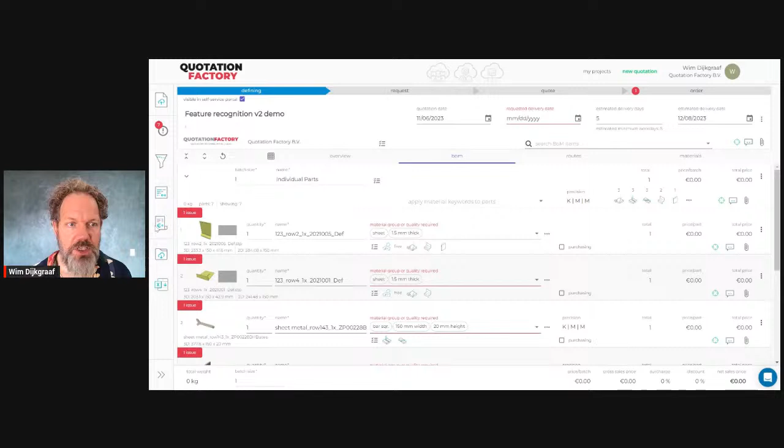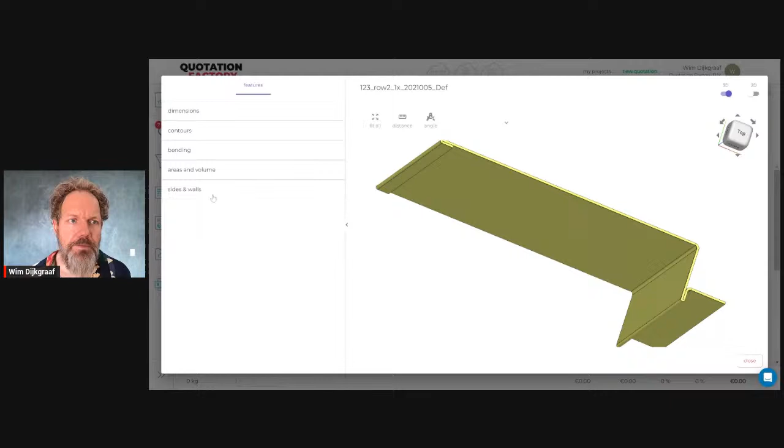my screen became visible. So what you see now is previously we already showed the features that we found, but there's a table here in the left bottom corner of this window, and it was not interactive. What we can do now is, let me remove this 2D model such that we have a little bit more space to work with, like this. You can now open this up, and where it is underlined, it's interactive. So I click this, and now you see this hem being highlighted. You also see here the various properties of this hem, and the fact that this bending is a hem already was known by this attribute yes.

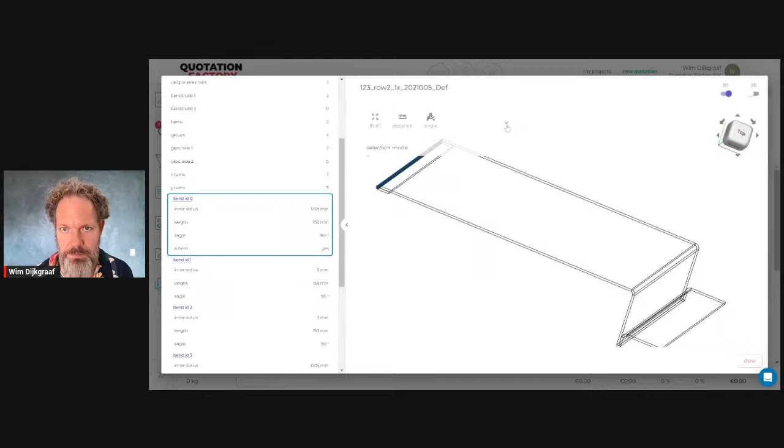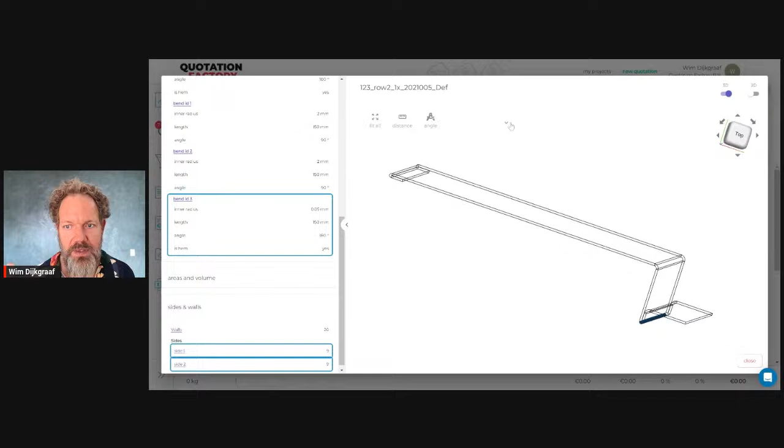In order to find the highlighted features more easily, you can also show it as a wireframe. So for example, if I now go to this, then you see this bending, this normal sheet metal bending being highlighted. I can also press this, that bending is highlighted, and I can click this, and you see that the other hem is being highlighted. Yeah, so now the features are interactive in the viewer, and you can highlight them.

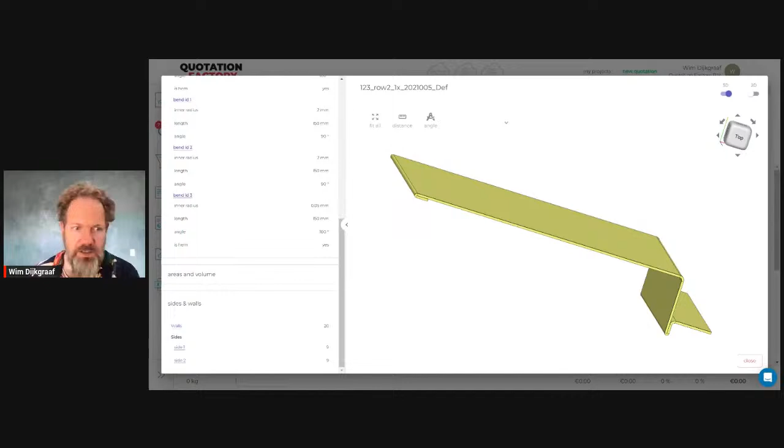Also, something important to note is that most of our sheet metal related customers, they really want to be able to assign a side which should be the upper side. For example, if it has a foil side or a surface side, like a certain pattern. We are pretty close to that, because as you can see now, you can highlight a whole side like this, or the other side. All the information is known and also in the viewer. So we are just a little step away from also adding this feature to the platform.

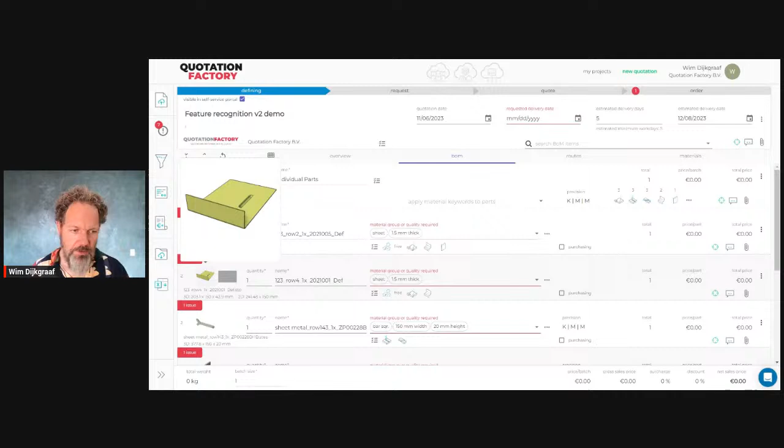Well, what's the whole idea behind feature recognition? That in the end, if you assign a feature to a working step, and that working step to a machine, and for example, also that working step to a party in the supply chain, you actually create a route. And that route has the information in it, which features, where in the process will be manufactured, which way, by whom, on which machine.

And because we do feature recognition, we also can de-feature features, such that we can create 3D models of how the product looks in all the intermediate steps in the whole route. Which also means that in the near future, you will have 3D models that only contain the features needed in order to program the CAM system for that specific machine and for those specific features to be manufactured.

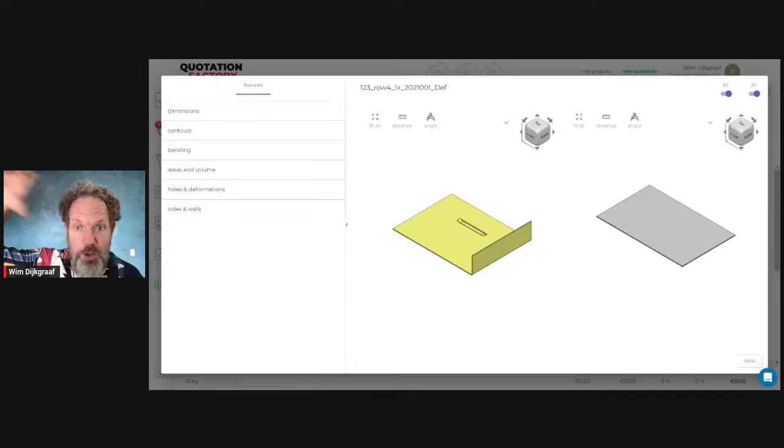So the Quotation Factory platform will be able to create the 3D models throughout the whole route, which you can use as input for the CAM systems. But you can also use it as input for decisions like, can I pick this up with a cobot, the way the product looks at this moment in the production process? Or can the cobot stack it, one product on top of the other, or do we need an additional operator to do that with this model?

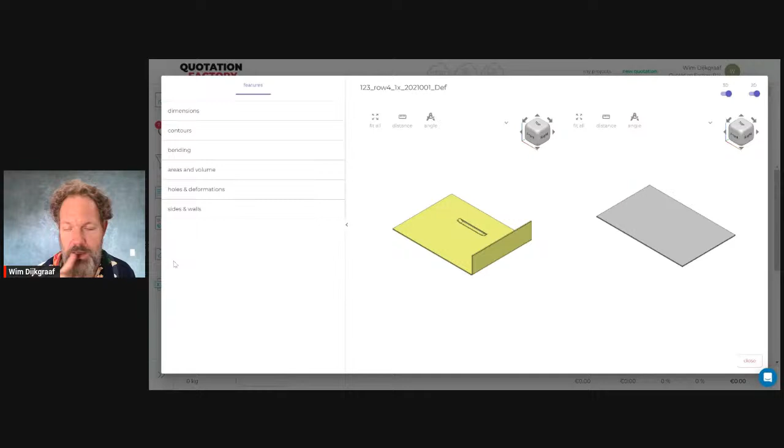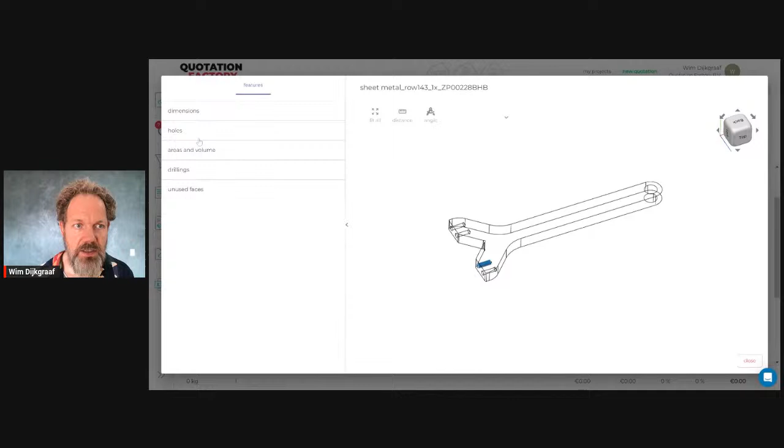So the use cases for having all those models of the product during the route are way more versatile than only for quoting and work planning purposes. Let's have a look at this product. What you see now is that if we recognize drilling holes, you can also make them visible. So it becomes way more clear what is recognized and how it is recognized. And for example, also this hole in this model.

What else? This might be relevant as well. Let's have a look at this tube. The reason why I show this is to show you that now you have a generic CAM system that knows all about the features, and with those features, you can automate the decision-making process around manufacturability, and you don't need the underlying specialized CAM systems for this.

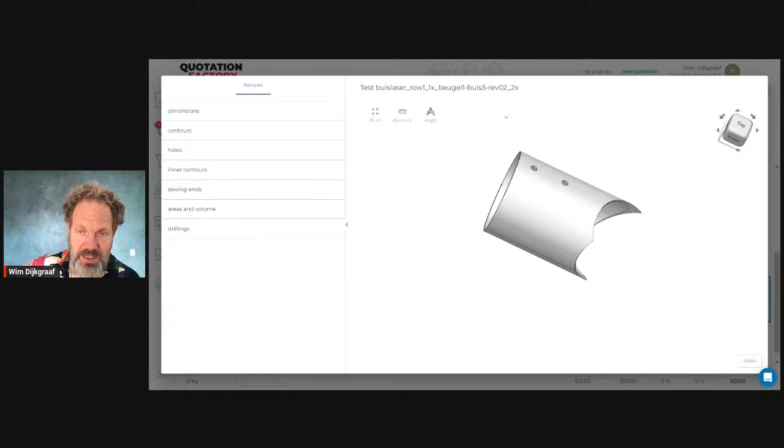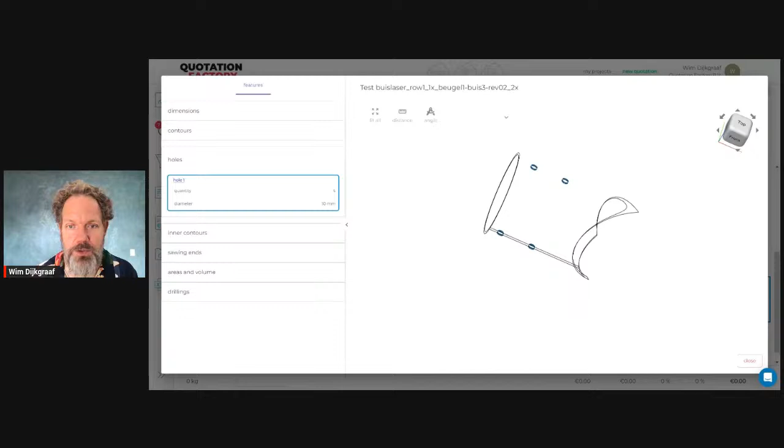Let me put it as a wireframe, and then we can highlight those holes. Also here, if the hole diameter is too small to cut it with a laser cutter, and it should, for example, be drilled, then we can make that decision automatically using business rules. We can remove those small holes from the 3D model as input for the tube cutter. And if the tube cutter is able to engrave, we can also include an engraving in there as preparational work in order to make the drilling more effective, efficient, accurate.

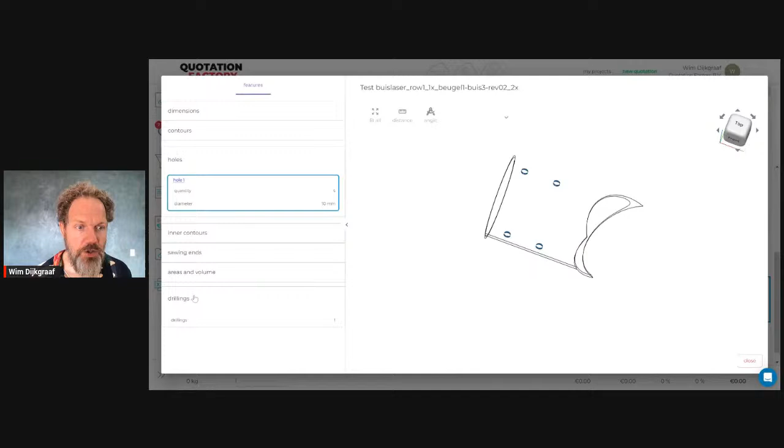So there are a lot of use cases for this. And you don't need the process planners, etc., to use CAM and CAD systems to create all the intermediate models and to make these decisions based on human decision management. We can automate this. Sorry, this was not what I meant. I meant this one. So also here you see the sawing side. One side is flat and could eventually be sawn. Probably you are not going to do that, but it's just an example.

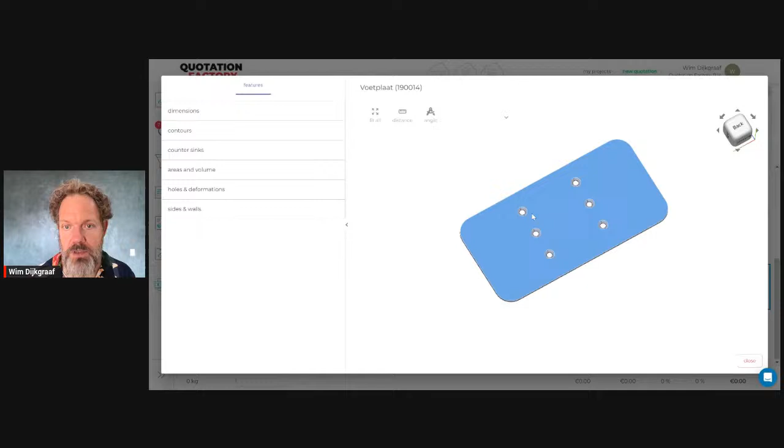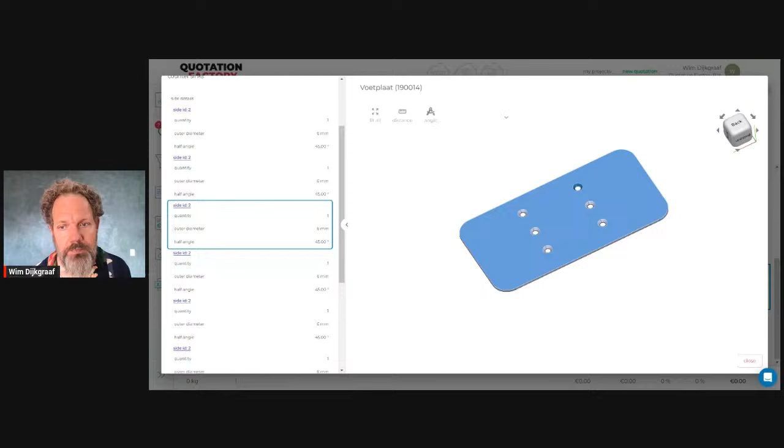Last example from the point of view of countersinks. So here you see various countersinks. You have to be careful not to cut the outer diameter, but the inner diameter. So what we can do here is those countersinks are known. They are highlighted here. We can remove the countersink as input for the sheet cutter just to make sure that it will be processed correctly. And of course, the countersinks are part of the PMI data that will be part of the 3D model that can be used for the countersinking working step and machine. So that's what we are heading for.

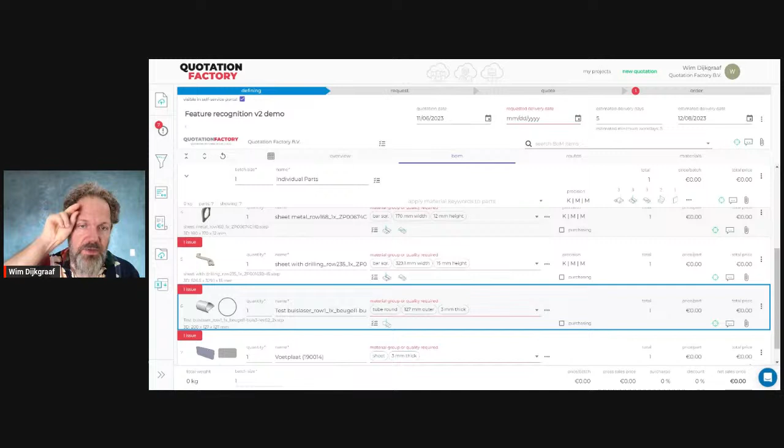Just to summarize, features are highlighted now in the 3D model. Within the next couple of months, specific features can be allocated to specific working steps. In other words, how are we going to manufacture this feature?

Those working steps will be allocated to the machine that produces it, as well as the party that is going to manufacture that. So the route will have a very nice granularity within Quotation Factory of features mapped to working steps, mapped to parties that will be doing that working step, as well as the machine on which it will be manufactured. And you will be able to do that interactively without using CAM systems. And you will be able to use business rules in order to make those decisions as automatically as possible.

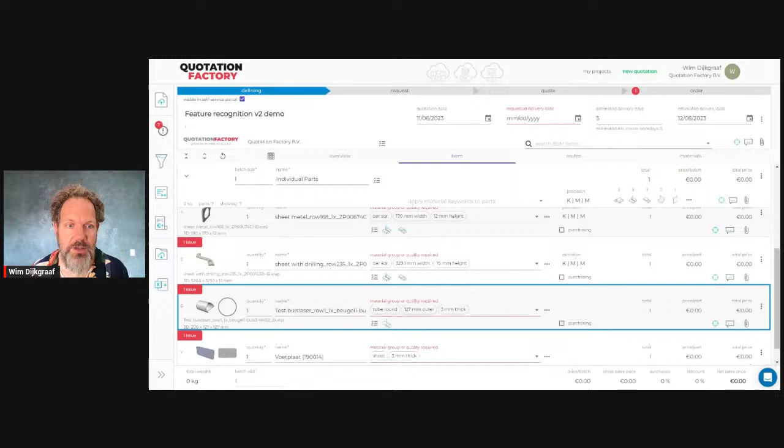And then on top of that, we will be able to remove features based on the whole route, such that for the intermediate steps in the route, you have 3D models representing how the product looks at that moment in the production or manufacturing process. So that's what we are moving towards in the next couple of months. We will roll out these features bit by bit.